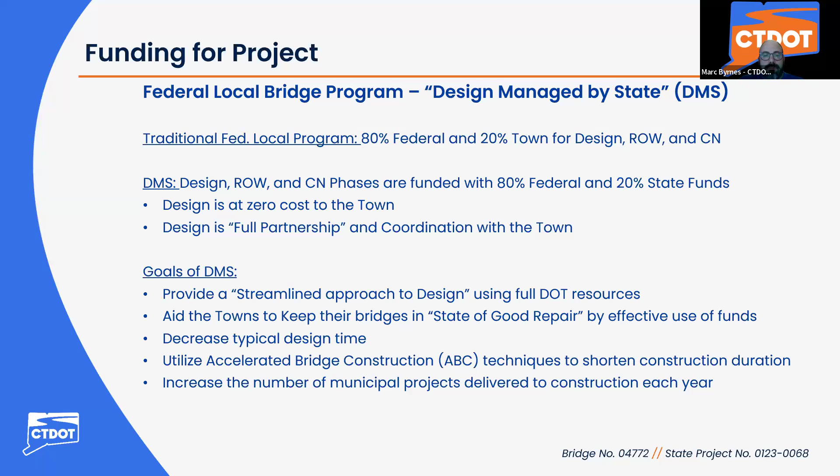The rest of the CTDOT project team is shown here. Our division chief of bridges is Bart Sweeney. Derek Lassard is principal engineer of the consultant liaison unit. As I said, I'm Marc Byrnes, supervising engineer. Michelle Rain is the project engineer for this project. Representing the Office of Rights-of-Way is Zach Areno, project coordinator. Representing GM2 Associates, the department's consultant liaison engineer, are Mike Brady, project manager, and Dan Carnein, project engineer.

Here's a slide showing some key structural bridge elements. Shown on top is the bridge deck, which supports all traveling people, vehicles, bicycles, etc. Supporting the deck is the bridge superstructure, in this diagram steel beams. Supporting the deck and superstructure is the bridge's substructure, and in this diagram there's a midspan pier, used depending on how long the span is—there may be one pier, multiple piers, or no piers. Beneath the substructure, as part of the abutments, will be either spread footings or some sort of pile support and foundation. These key elements are rated on a scale of 0 to 9, with 9 being excellent condition and 0 being bridge closed.

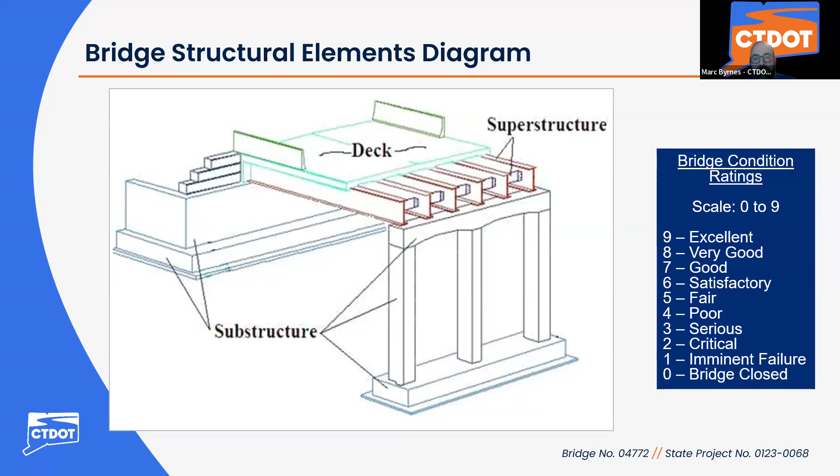I'll now turn it over to Dana Barrow, First Selectman, Town of Scotland. Dana.

I want to thank you, and I basically want to thank everybody involved in the project. As you can imagine, we're such a small town. To come up to replace these 3 bridges, and then actually the 4 bridges they're doing, would probably put the town behind the 8 ball for the next 50 years budget-wise. We have 1,600 people, and each one of these bridges runs over $3 million. So it would be almost impossible for the town to survive and replace the bridges.

So we'd end up just leaving them in the brook. So we really want to thank everybody at the state for working on it, and appreciate you not sliding it. Like we talked about, apparently that's not going to happen. So not sliding it to the back of the list. Because we've been driving around these. It's hard for the buses like any town. You have to turn around. We had to make turnarounds for the buses and that type of stuff.

So we really appreciate you all working on it, and the town of Scotland appreciates it a lot. And I'll make sure everybody knows that this is the state of Connecticut and the federal government helping us out a lot. But thank you. That's about it.

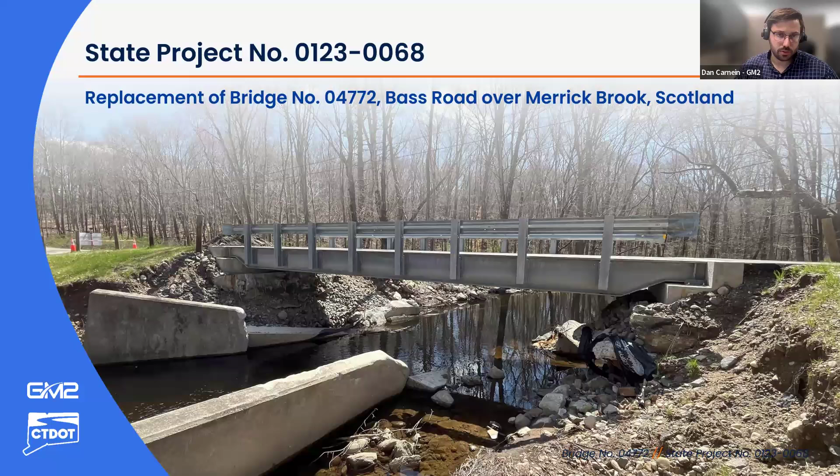Good evening, everyone. I'm Dan Carnein, the project engineer from GM2, here to present the project-specific information for project 0123-0068. Bridge number 04772 is located in the town of Scotland along Bass Road, approximately 0.25 miles south of the intersection with Gager Hill Road.

This is an aerial view of the bridge, which is in a rural forested area. There is an agricultural property to the north of the bridge, Bass Farm. And then there's a Connecticut DEEP owned Talbot Wildlife Management Area located to the west of the bridge. There's also a couple of residential properties located to the south.

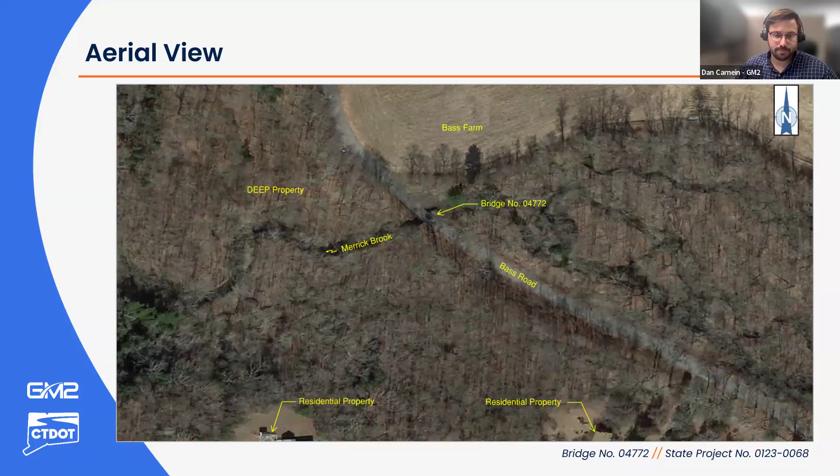The original bridge consisted of a concrete slab and beam superstructure on concrete abutments and wing walls. In 2020, an Acrow bridge was installed over the entire original bridge. In 2023, the Acrow bridge was made more permanent with installation of helical bridge piles and tiebacks. The original superstructure was also removed, but the abutments and wing walls were left in place. The original bridge had a span length of 21 feet, a curb to curb width of 22 feet 9 inches for 2 lanes of traffic, and a skew of 19 degrees.

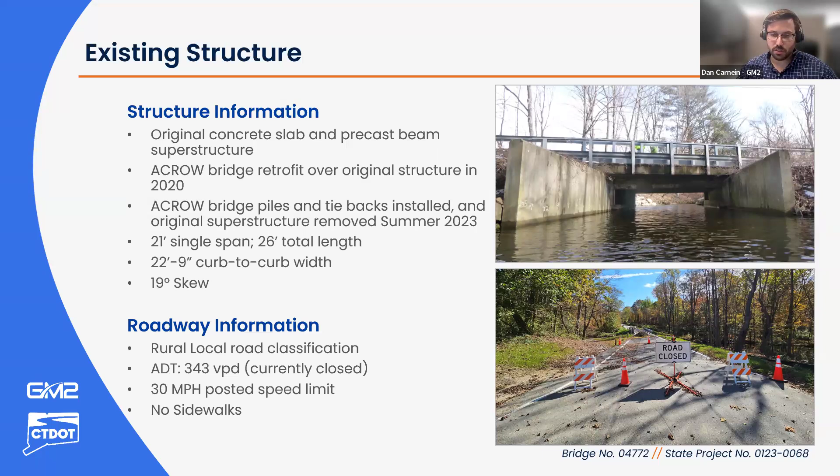Bass Road is classified as a rural local road with the estimated average daily traffic of 343 vehicles per day before its closure. The road has a posted speed limit of 30 miles per hour and no existing sidewalks. The original structure had 2 travel lanes and approach rating of 6. However, more recently, the installed Acrow bridge utilized 1 lane of stop sign controlled alternating one-way traffic. The current approaches also have no metal guide rail systems and only use the wood posts along the edge of the road.

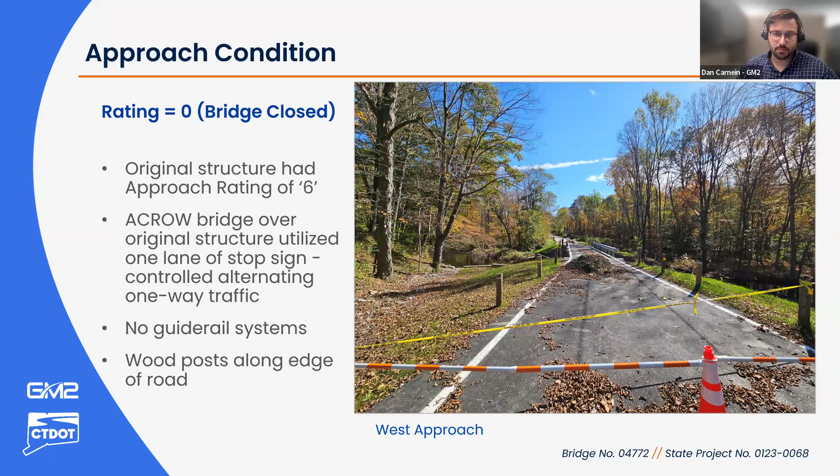The existing structure has a condition rating of 0 due to the failure and road closure. The original abutments and wing walls collapsed into the channel during the fall 2023 storm events. The Acrow bridge is only being supported by the helical piles and tiebacks. However, the piles and tiebacks were exposed during the storm event, resulting in the bridge closure.

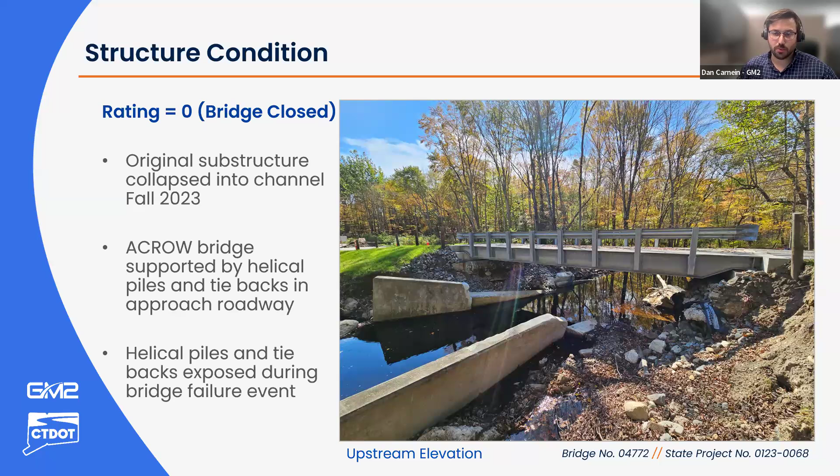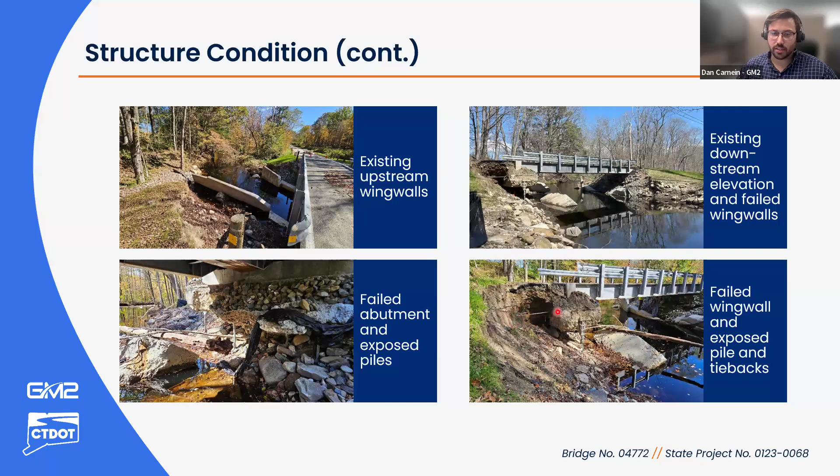Prior to the closure, the bridge had a history of scour activity and poor hydraulic performance. So in other words, the brook has caused erosion at this bridge in the past. The Acrow bridge was originally installed in 2020 due to scour erosion and undermining of the original abutments. And because of that, the bridge was rated scour critical prior to the failure in 2023.

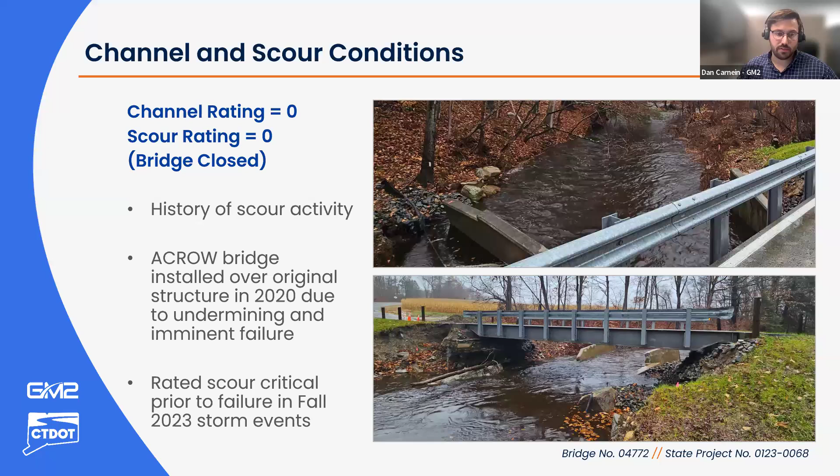So project number 0123-0068 will address all the existing conditions that have been presented, with the main purpose of addressing the failure of bridge number 04772 and opening Bass Road to vehicles. The project will provide a new bridge that, 1, meets current design standards, and 2, is resilient to future storm events to ensure that this does not happen again.

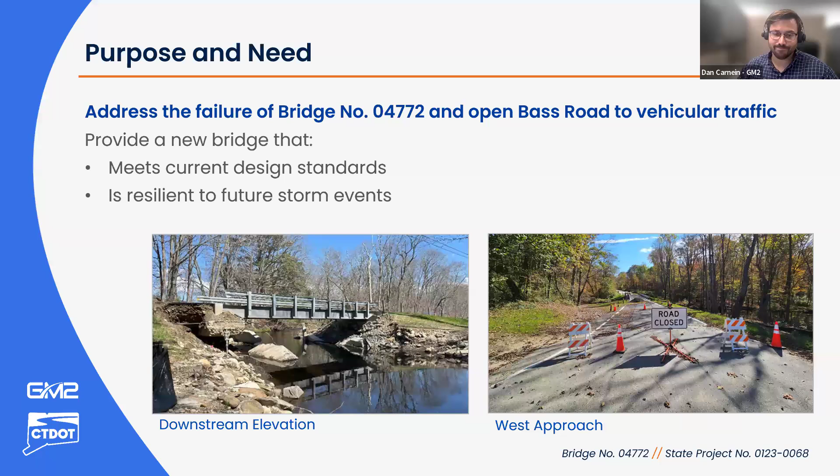This project will involve a full bridge replacement with a new bridge that consists of a precast concrete beam superstructure supported by integral abutments founded on deep pile foundations. The span length will be increased from the original 21 feet to a 54-foot clear span. The proposed bridge will have a curb-to-curb width of 24 feet to accommodate 2 12-foot travel lanes, so 1 lane

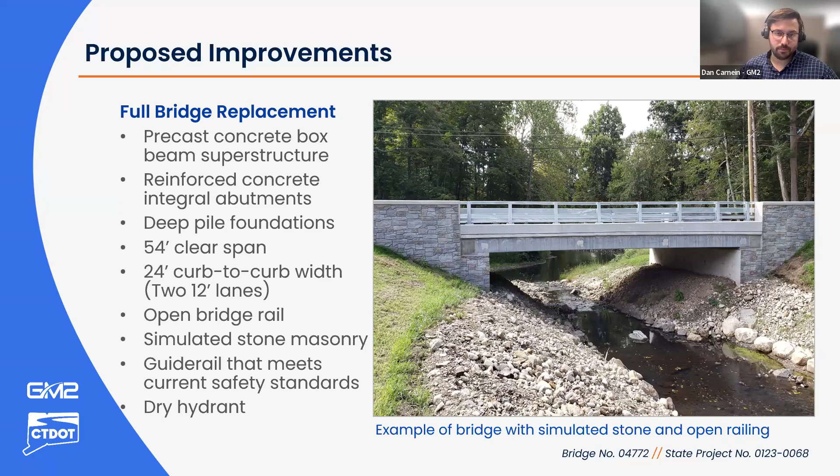In addition to the bridge improvements, this project will improve the hydraulic conditions at the site. The proposed 54-foot clear span is much larger than the original 21-foot span. This will provide a much larger hydraulic opening that allows more water to pass under the bridge. Because of the proposed improvements, the roadway will not overtop during a 100-year storm event. And for reference, the original bridge caused roadway flooding during a 50-year storm event.

The proposed hydraulic improvements will also result in no calculated scour at the bridge, which means we do not anticipate any erosion at the bridge during a 200-year design storm event or even a 500-year event. Additionally, embankment protection will be installed to stabilize the channel and embankments. And if for some reason scour were to happen, the bridge would remain supported and operational with the deep pile foundations.

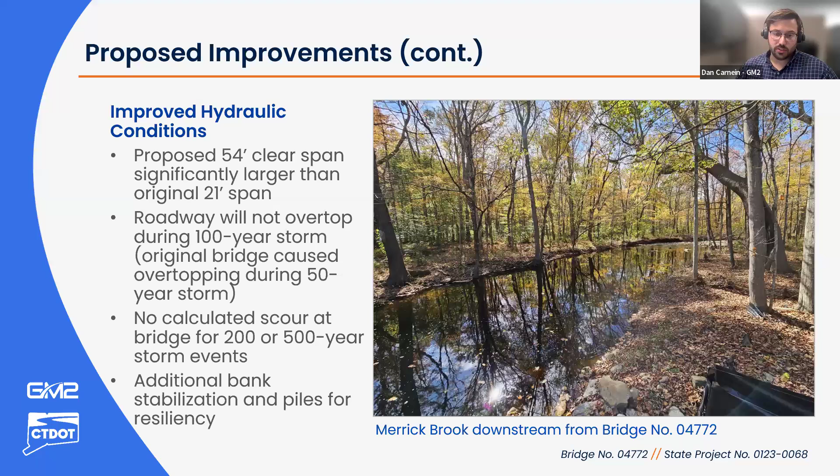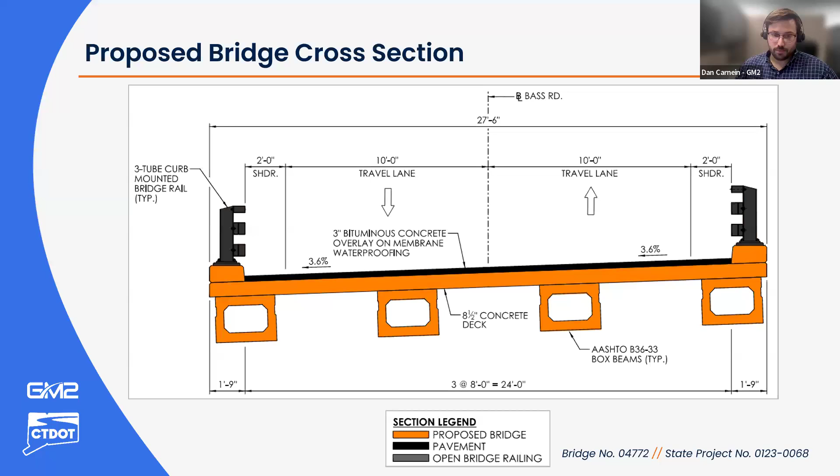The bridge will utilize integral abutments, which means that the beams of the bridge, the abutments of the bridge, and the pile foundations for the bridge will be connected and act as one system that eliminates the need for any additional bridge joints in the roadway. The elimination of the bridge joints will result in less maintenance for the bridge over its lifetime.

And then under the bridge, the channel will be reconstructed to have stable slopes, and the embankment protection will be installed in the form of stone riprap. That riprap will also be top dressed with 12 inches of natural stream bed material.

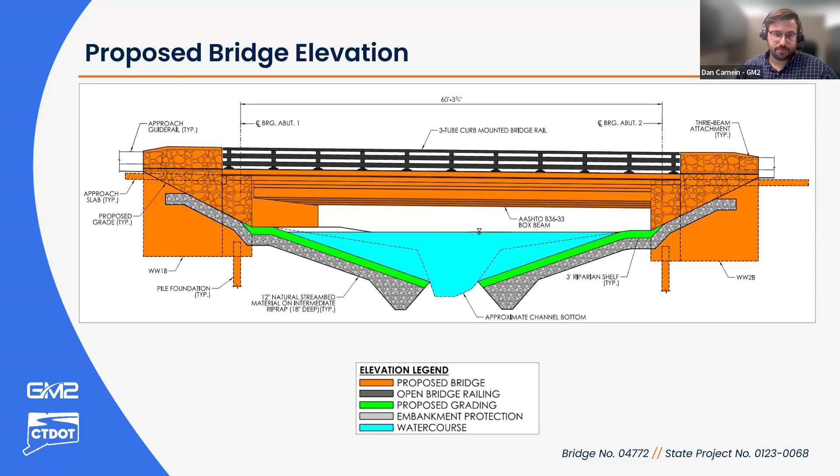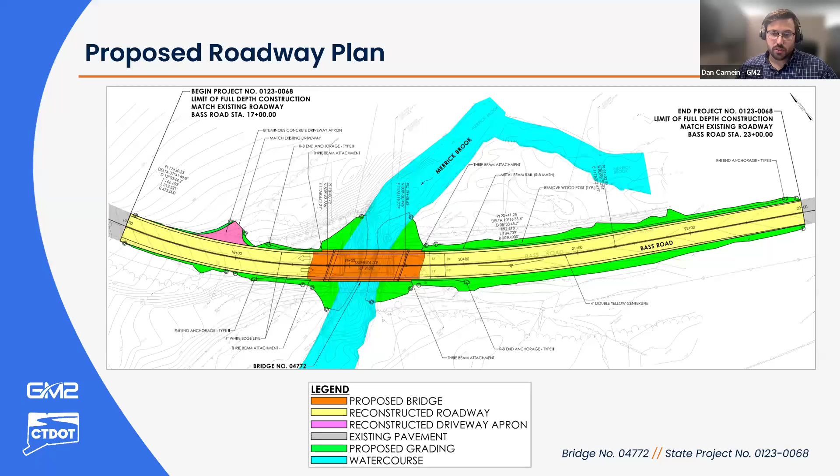The proposed grading can be seen in green. And looking closer at the bridge, you can see the grading extends upstream and downstream from the bridge. This grading is required to remove the existing failed wing walls and reestablish the channel and embankments.

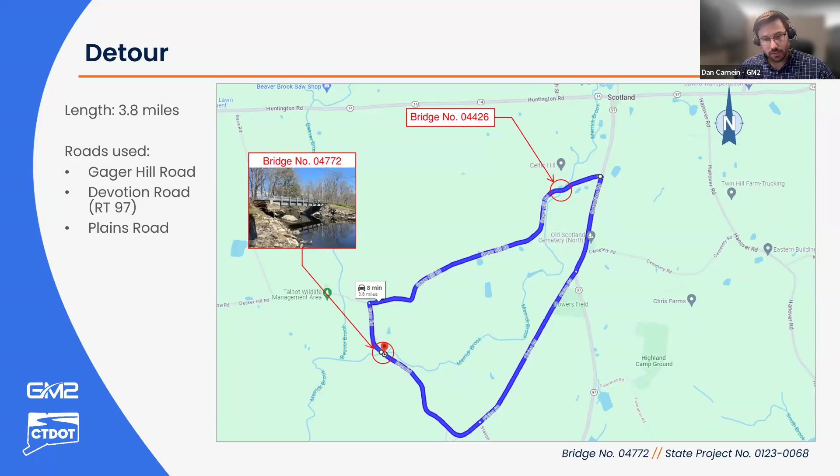And we also want to note that this project is not located within a mapped FEMA flood zone. Therefore, no flood management certification is required. And this will also result in design time savings.

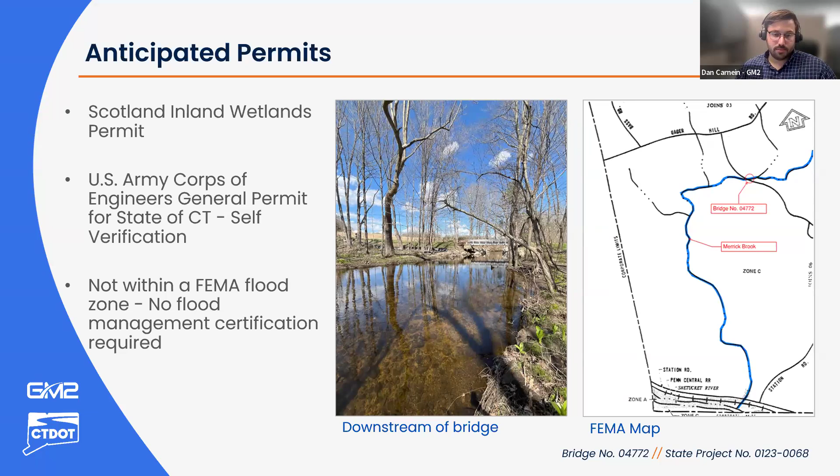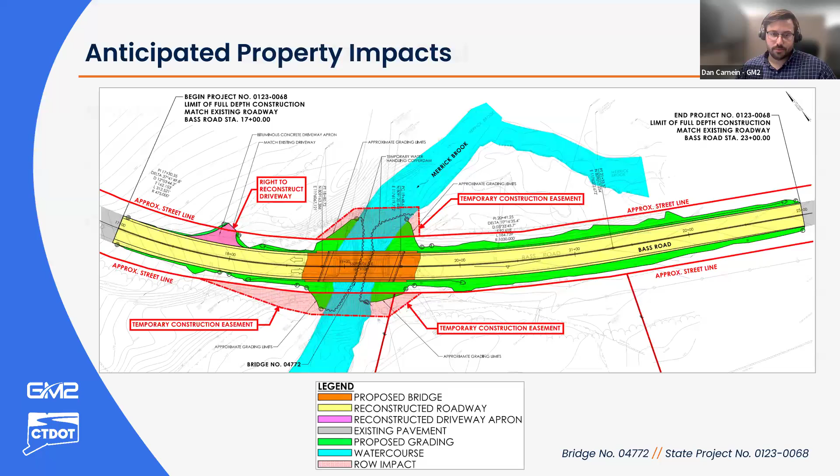We would like to keep in mind that these impacts are based on preliminary design plans, so these impacts could change as design progresses. So construction for this project is scheduled to start in the spring of 2027 based on our standard project schedule, and the construction would last 6 to 8 months or one construction season.

The construction cost, including incidentals and inflation, would be $3,259,000. 80% of that would be from federal funds and 20% covered by state funds. And it would be no cost to the town. Please note that the schedule and costs are preliminary and subject to change for this project.

And due to the current state of the road, our goal is to bring that start of construction in to 2026. We plan on meeting that date by accelerating our design schedule as much as possible and reducing our permitting and right-of-way impacts as much as possible. So as mentioned earlier, we will not need a flood management certification, which will help. And we will also make sure that this project remains eligible for the Army Corps self-verification permit. That'll also help reduce time.

So at this time, I will turn it over to Zach Guarino from the CTDOT Division of Rights-of-Way to discuss the rights-of-way process. Thanks, Dan. Good evening, everyone. My name is Zachary Guarino, and I'm a project coordinator with the Department's Division of Rights-of-Way. Our office is responsible for acquiring the proper rights for transportation projects. As Dan mentioned in the presentation, this project will require the acquisition of property rights, so I'd like to give a brief overview of our acquisition process.

So the right-of-way acquisition process begins once the design has progressed to a development milestone and all of the impacts have been determined. At this point, each affected property owner will receive a formal letter of intent to acquire from our office, along with a property map which depicts the exact property rights to be acquired. And on the screen here is an example of a property map that an owner may receive. It shows the existing conditions as well as the proposed improvements to the property.

Next, our office will determine the fair market value of the property rights that were depicted on that property map. And that's going to be used to establish an offer of just compensation. That offer will be sent out to the property owner in writing, and a right-of-way agent will be available to meet with the property owner and explain the project, go over the specific impacts to their property, and explain how the state arrived at its offer. The property owner will be given a reasonable amount of time, typically 30 days, to consider the state's offer and enter into negotiations.

When an agreement is reached, the department will prepare all the necessary paperwork to record the deed and property map on the town land records. However, if an agreement cannot be reached, in order to keep on schedule, the department may acquire the necessary property rights through its power of eminent domain. In that event, the state files a notice of condemnation in the Superior Court along with a monetary deposit in the amount of the state's offer.

The owner would have 6 months from that date to file an appeal if they felt that the state's offer was inadequate. Whether or not the owner chooses to appeal, the money deposited in the court is available to be withdrawn by the owner. And it's important to note that the state only acquires property rights that are needed for this specific project. If there are any questions regarding the right-of-way acquisition process, I can answer them after the presentation. With that, I'll turn it over to Michelle for the Q&A. Thank you.